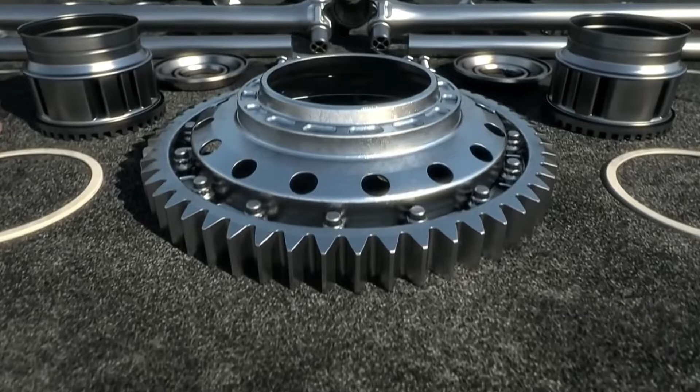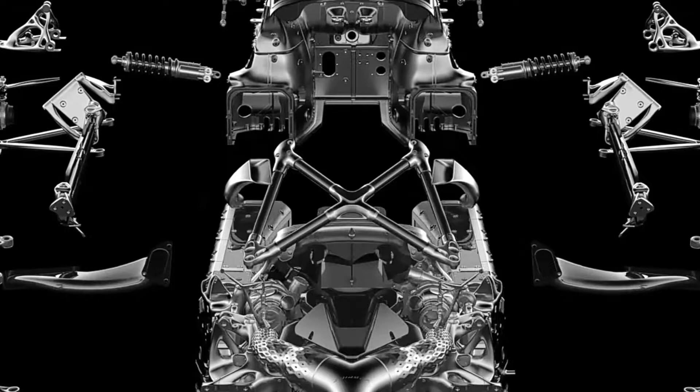A vehicle needed to operate in any kind of medium requires several basic components. The characteristics of each component will be designed by analyzing the operating medium and other performance requirements. Without further ado, let's get down to the basic components of the vehicle in a reverse engineering approach.

To move the vehicle by exerting forces against the working medium, we need efficient propulsion systems for each medium. The next component is the power unit, which generates the drive force to power the propulsion system. A transmission system is required to transmit power from the power unit to the propulsion system after needed conversion and modifications. To maneuver the vehicle, that is, to change the speed, altitude, and direction in each medium, we need maneuvering systems.

The energy input to the power unit is provided by the energy store or energy source. The auxiliaries include components that support the main components and other elements that add comfort and other additional features. All the components mentioned above are purely mechanical or electrical members. An efficient control system is required as an interface to manage the operation of each member, according to the needs of the operator. To house all these elements and to bear all the forces, we need a rigid frame with external body panels, these elements together termed as structural body.

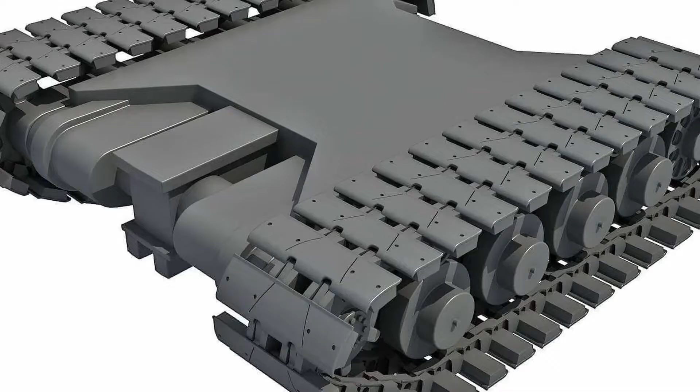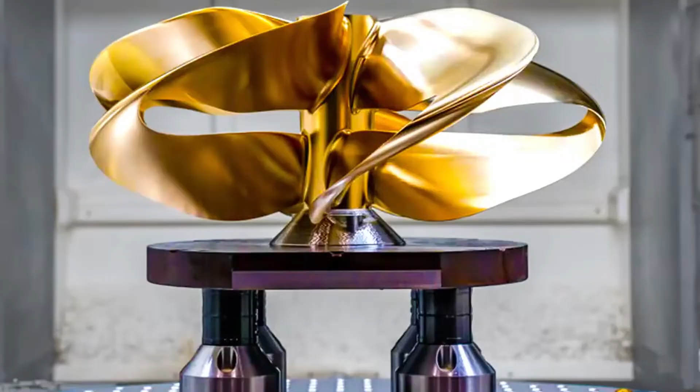Propulsion systems: the system responsible for the movement of the vehicle by exerting forces against the working medium are called propulsion systems. On land, the propulsion unit of the vehicle has to exert forces against the ground in the form of rotational or sliding motion to attain translational motion of the vehicle using wheels, tracks, sliders, compressed air cushions, etc. In water, the propulsion unit has to exert thrust force to move the vehicle using paddles, screw propellers, Sharrow propellers, water jets, air cushions, etc.

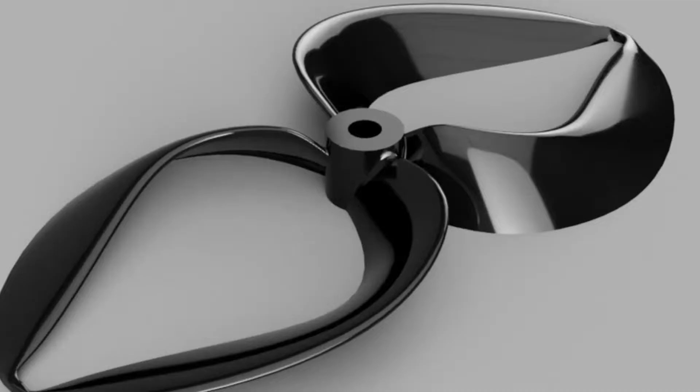In air, the propulsion unit of the vehicle needs to apply thrust force by means of aircraft propellers, toroidal propellers, rotary wings, jet engine nozzles, duct fans, etc.

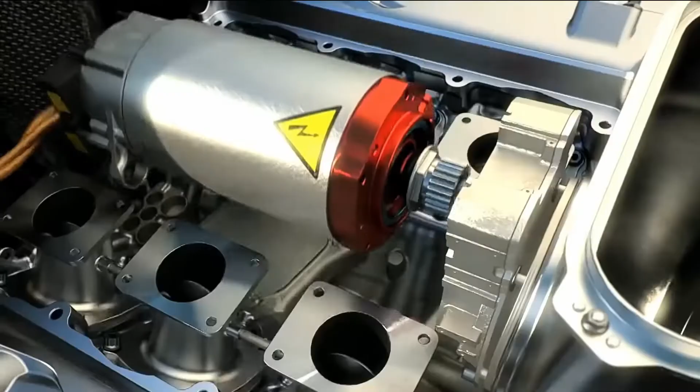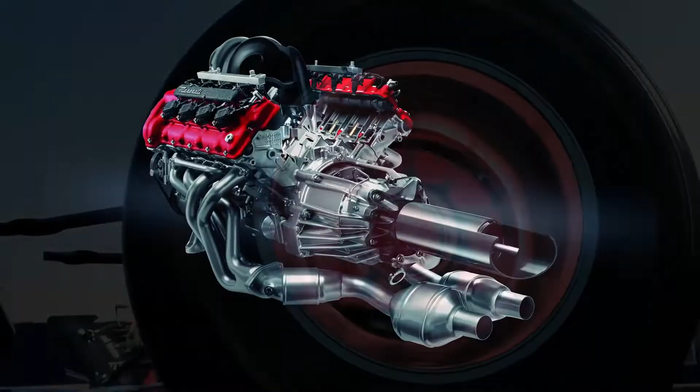Power units: a vehicle needs a unit that generates enough power to drive the final drive or propulsion system. The output energy of a power unit is supplied directly or indirectly to the propulsion system. IC engines, gas turbines, steam turbines, fuel cell engines, nuclear power units, electric motors, etc. are some common examples of power units.

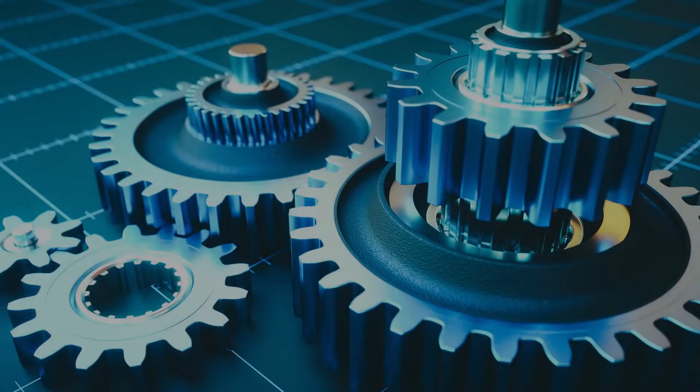Transmission systems: the transmission system acts as an intermediate agent for transferring power from the power unit to each propulsion system. This system includes gears, friction plate clutches, electromagnetic clutches, shaft couplings, fluid couplings, etc. The power unit, propulsion system, and transmission system together are termed as powertrain.

AMPHICOPTER needs three kinds of propulsion systems to operate in air, water, and land. All the propulsion units need individual power input too. The main challenge faced while designing these vehicles will be the drastic increase in the weight of the vehicle due to the presence of multiple power units.

For example, 3 individual motors are needed to power 3 different propulsion units. The problem here is the drastic increase in weight will adversely affect the aerial movement of the vehicle, where the weight of the vehicle is a crucial factor. In order to avoid this problem, we have to switch the power to 3 different propulsion systems from the same power unit using a simple, lightweight transmission mechanism.

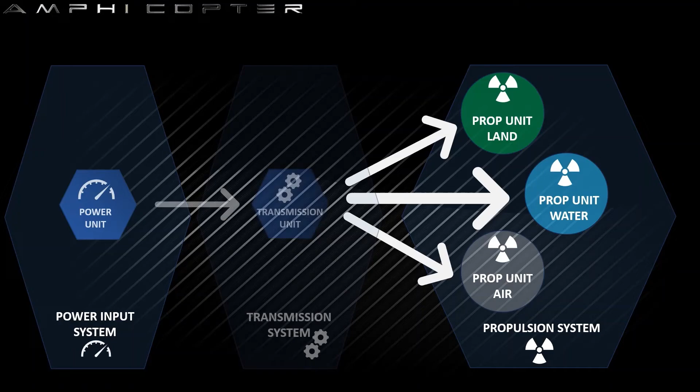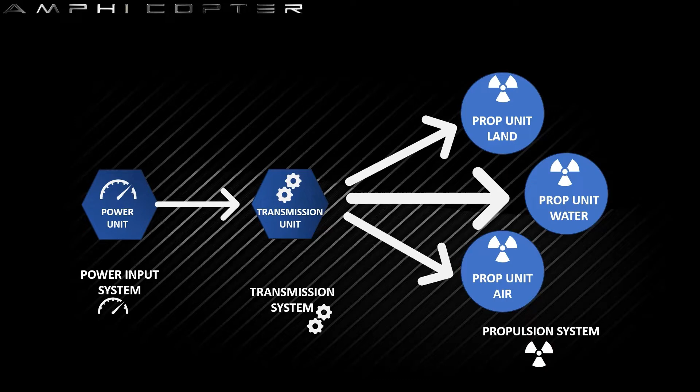Things to consider: the propulsion units, power unit and transmission unit must be chosen and configured in such a way that they can work together as a single system. The input power to all 3 types of propulsion units should be similar, for example, shaft power.

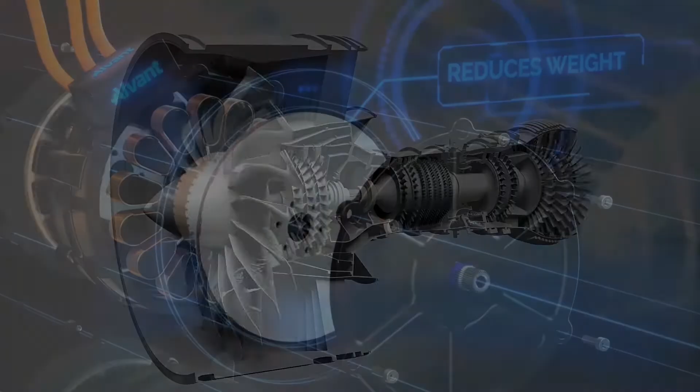The power unit should be flexible to every working condition in terms of torque range, speed range, etc. The power unit should be light in weight, should have high power to weight ratio and high torque to weight ratio. The transmission system should have to transfer power to different propulsion units as needed.

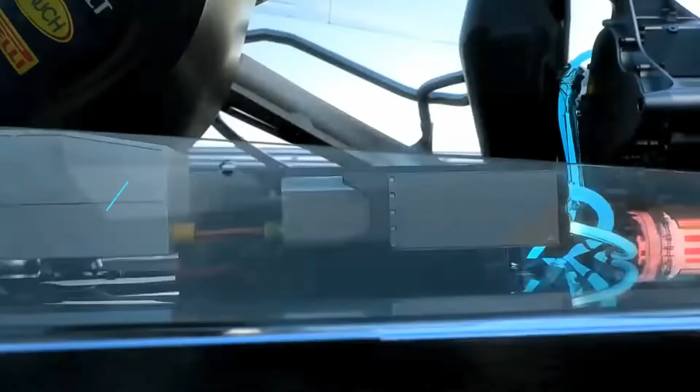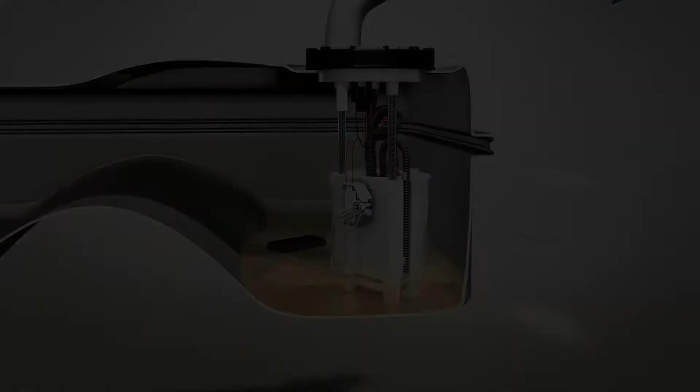Energy source or energy store. To provide input energy to the power units, energy sources are also needed. It is directly dependent on the power requirements of the power units. Things to be considered: it should ensure a decent operating range and operating time to the vehicle, and should have the ability to recharge, refill, or replace.

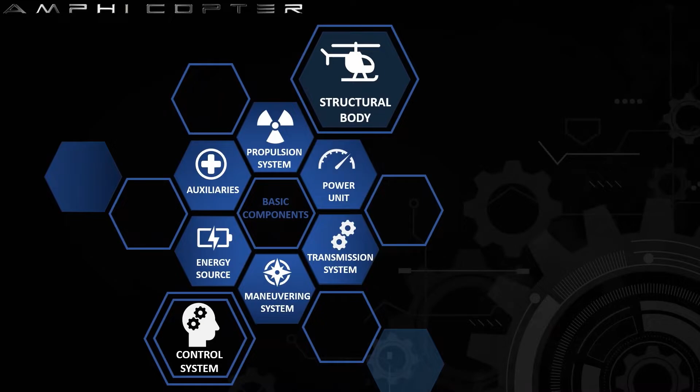Maneuvering systems are the systems responsible for changing the speed and direction of the vehicle. Its functions include controlling the speed of the vehicle by acceleration, deceleration, braking, etc., changing the direction of the vehicle in each medium, and performing other operations like takeoff, landing and hovering.

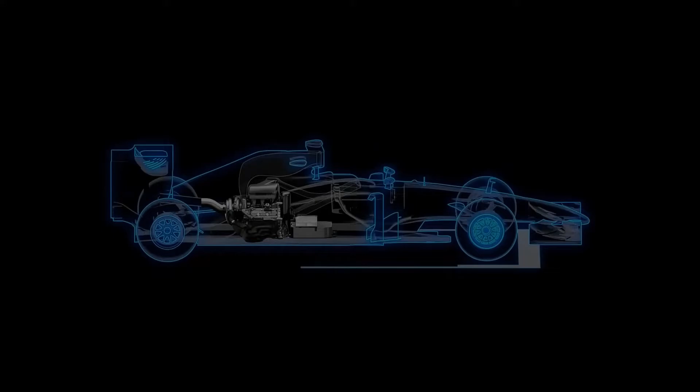Things to be considered: techniques like differential thrust, tank turn and regenerative braking should be added to maneuver the vehicle without excess weight. Design should be intelligent and optimized to achieve this in every aspect.

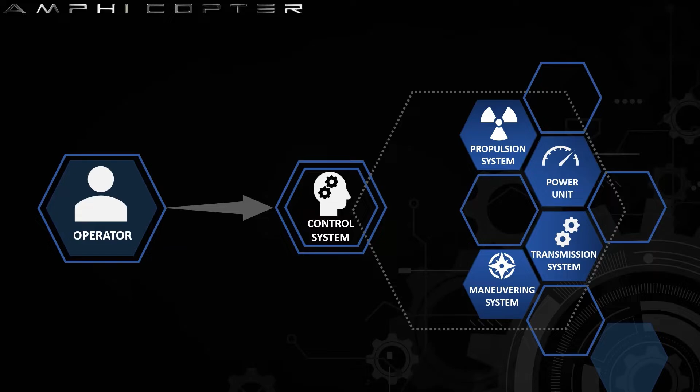Control systems. Propulsion systems and maneuvering systems are responsible for the movement of a vehicle in a medium, but the vehicle operator cannot directly handle them. An interface is needed to input the operator's requirements to those final drives. The control system acts as an interface between the operator and the drive units to drive the vehicle as needed.

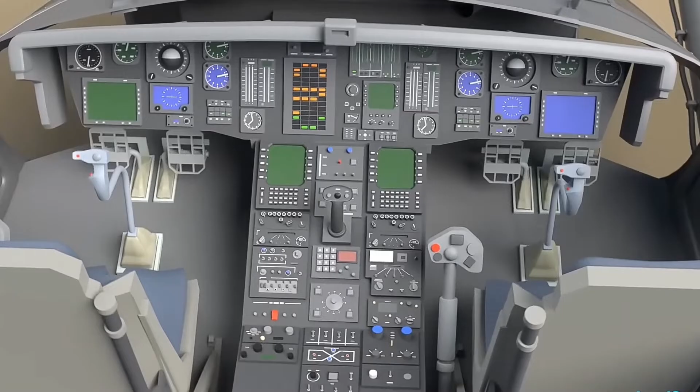The control system includes the operator input unit, vehicle control unit for air, water, and land operation, actuators, different kinds of sensors, accelerometers, global positioning system, onboard diagnosis system, communication system, etc. Units such as flight controllers must make decisions on their own to stabilize the vehicle in windy conditions.

Auxiliaries. The systems required to support other components of the vehicle and increase the comfort of the operator are called auxiliaries. These include lighting system, suspension system, air conditioning system, seating arrangements and other additional features.

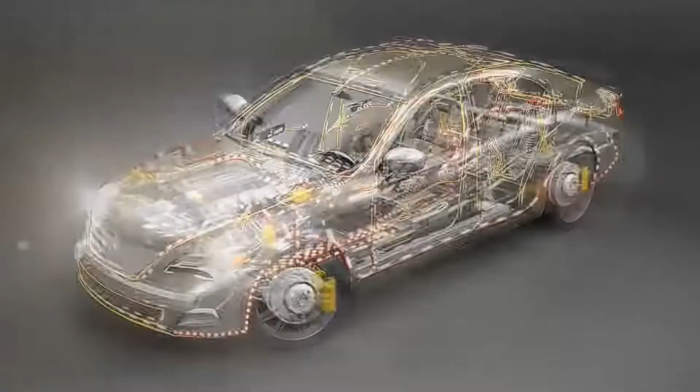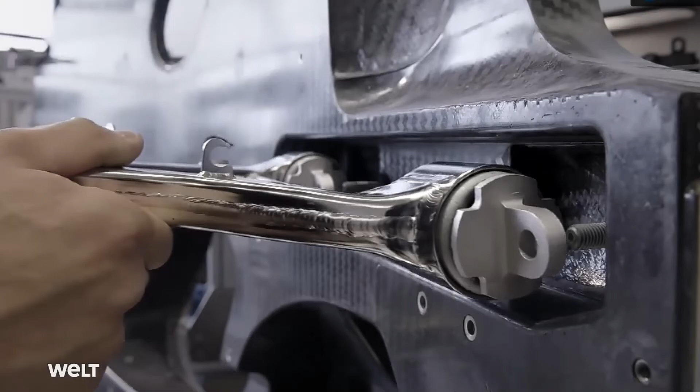Structural body. The structural body comprises lightweight body panels fitted to a ladder frame, backbone, tubular, or monocoque chassis. Its main functions: it bears all the stresses on the vehicle in both static and dynamic conditions, houses all the other components in place, gives rigid and flexible characteristics as per requirements, provides aerodynamic and hydrodynamic properties as required, and gives an aesthetic appeal to the vehicle.

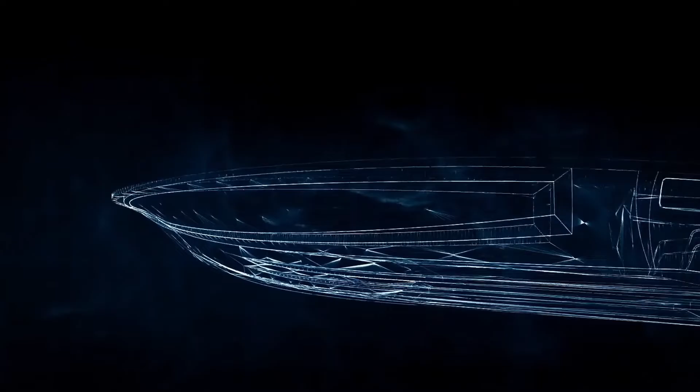Things to consider: in case of the AMPHICOPTER, as it needs to operate in all three mediums, the design of the structure should satisfy all aspects regarding aerodynamics and hydrodynamics as well as possible. It should act like a hull of a watercraft to float on water and like a fuselage when the vehicle is airborne. The structural body should be made of lightweight, stronger materials.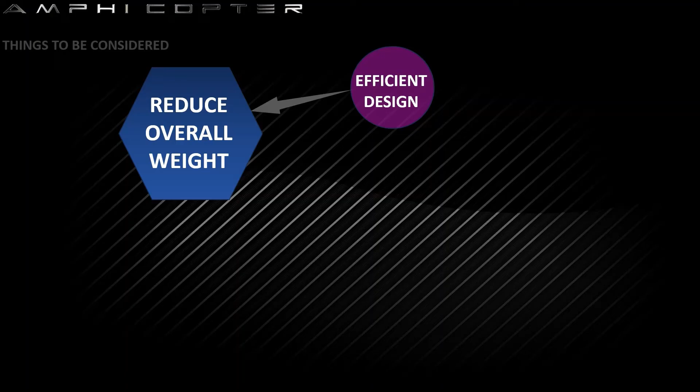When designing all the components of a vehicle, there are many things to consider. The overall weight needs to be reduced through efficient design and use of lightweight and strong materials, and the design should stick to an aerodynamic shape by avoiding unnecessary projections to reduce drag force.

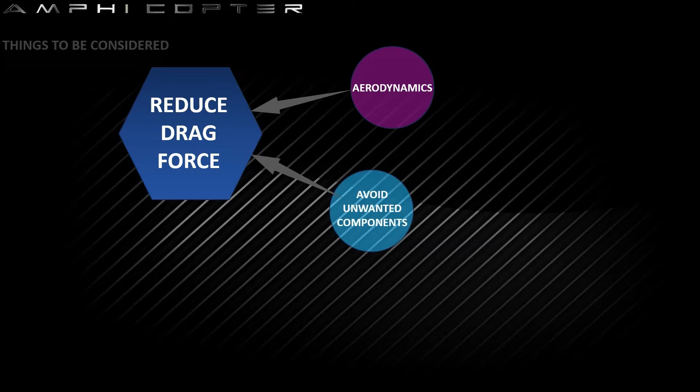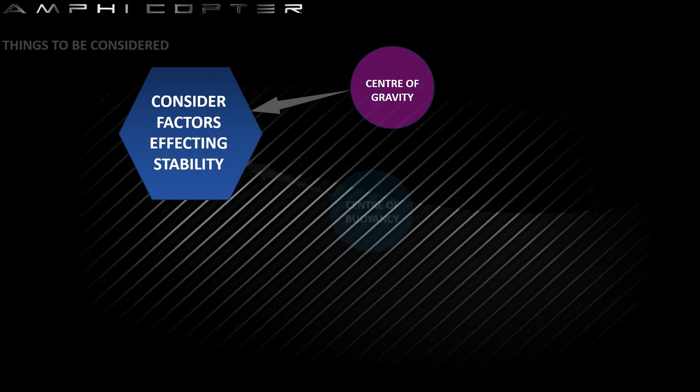In each medium, there are many supporting and opposing factors. To maximize efficiency and performance, we must design each member in such a way that opposing factors are limited and supporting factors are enhanced. Factors affecting stability such as center of gravity, center of buoyancy and metacentric height need to be considered.

The project started with basic design formulations with hand drawings. The design for each component, mechanism and outline of the vehicle was prepared in rough drawings. In that phase, I planned to prepare only 3D drawings with all the details.

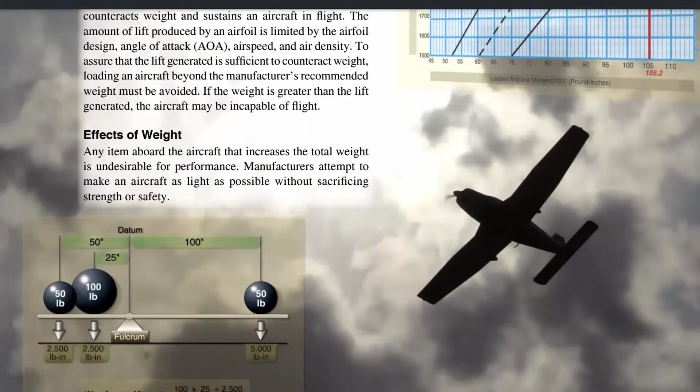But when the journey started, many books and technical contents were referred to in order to get knowledge about all the forces, dynamics and components of various kinds of vehicles. As we were willing to accept the knowledge, it further complicated the matter by providing details about more dependent factors in both static and dynamic conditions. But in fact, it brought the conceptual design into more practicality. So it is always better to stick to relevant scientific theories when doing design and development procedures.

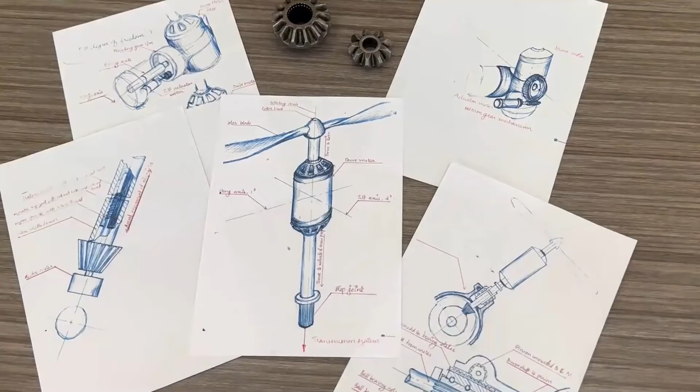Basic calculations were done to conduct feasibility studies, and a project report was prepared with detailed descriptions of all components. All the techniques required for basic operations including propulsion, maneuvering, speed control and other related operations in each medium are also explained in the report.

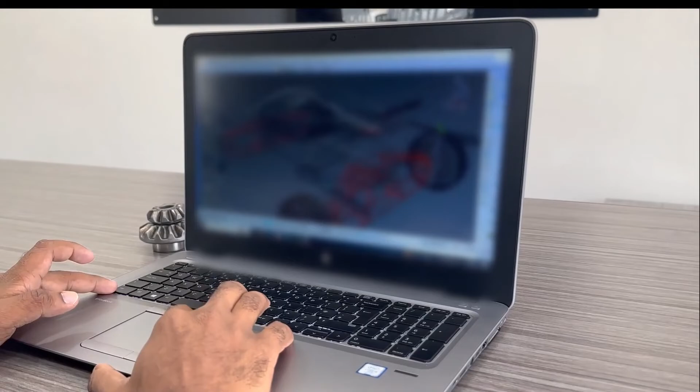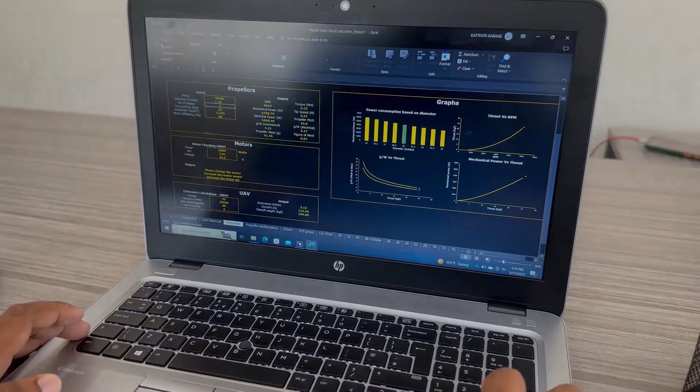The detailed 3D drawings were prepared in CATIA V5 software to define the basic design of the vehicle. Repeated cross-checking and refinements made the design of the mechanism simpler and more compact. Several charts and software were used to understand the required parameters of the aircraft propeller.

This presentation can be made more attractive and exotic by stating that this vehicle has futuristic features like EODAS, AI systems, advanced fire weapons, etc. But explaining those things would unnecessarily complicate the project.

As said before, the primary goal of the project is to design and develop a vehicle that can operate regardless of medium. So once it is developed, we can re-engineer the vehicle for different scales and purposes like surveillance, rescue, combat vehicles, freight vehicles with futuristic technologies and features.

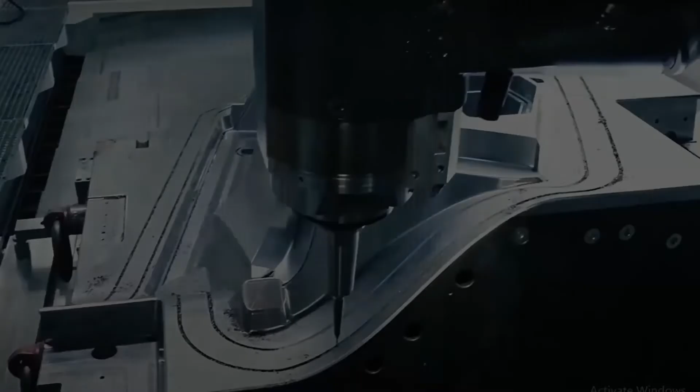The prototype of this vehicle is almost impossible to fabricate from my end. It requires more technical analysis at a higher engineering level and huge investment. Since it has to operate in air, complex testing and simulations like wind tunnel testing and CFD analysis are required. So it is impossible for a person from a middle class family to build this vehicle.

But with the help of the government and concerned authorities, it is possible to make this dream come true. And I truly believe this vehicle will serve our nation through military forces and uplift the pride always. While talking about this project, I am getting excited and emotional at the same time.